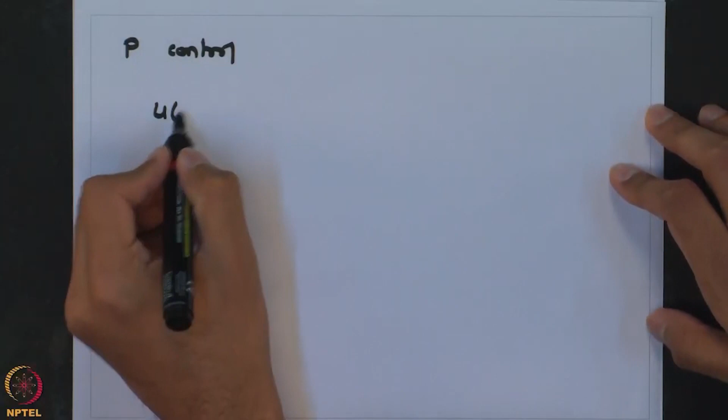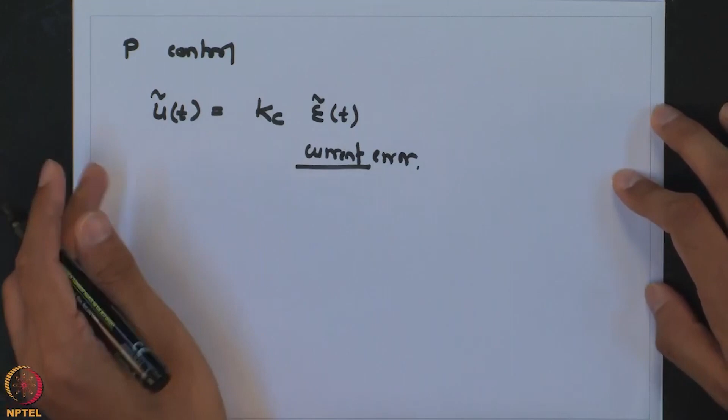So what we saw was that when we have a proportional controller, the deviation in u was proportional to the current error. So we are just looking at whatever is the instantaneous value of error, and the controller is taking action based on the current instant, and it is not looking at how the process has reached there. So there is no contribution coming from the past history of the process, and that is resulting into this offset.

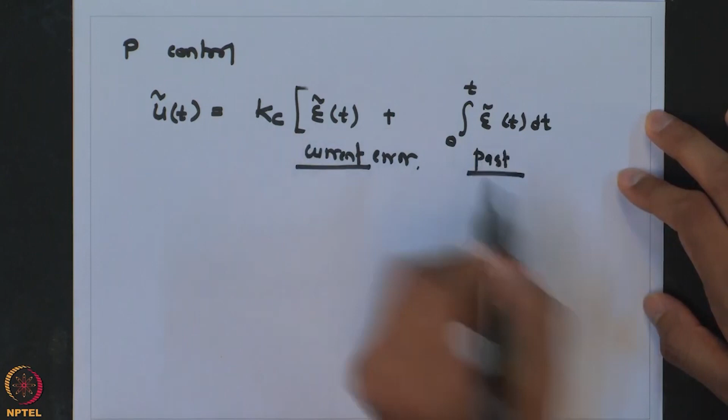So in order to improve this performance, or rather in order to get offset free response, what we do is, along with the current value of error, we also get a term which is proportional to the integral of all the previous errors. So along with the current contribution, we also look at the past contributions, or how the system has reached to that point, and the weighing factor for that is 1 over tau I.

Will come to the significance of that in a bit. So what we have is a controller which takes action proportional to the error as well as the integral of the error. That is why it is known as a PI controller, and we will see how this addition of integral action is going to cause the offset to go to zero even for finite values of controller gain.

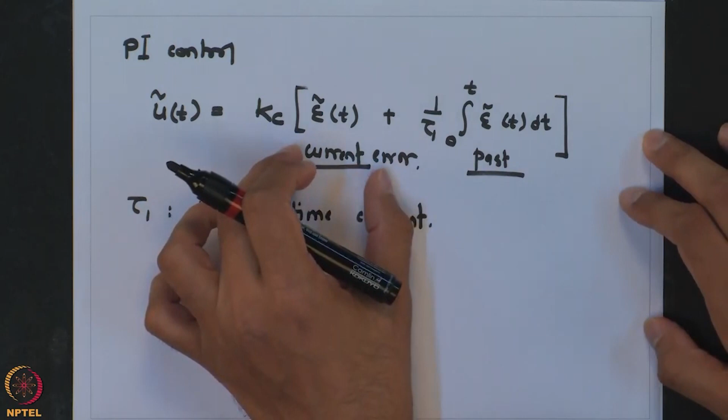So this tau I is known as the integral time constant, and in a sense it is used to trade off between how much contribution we want from the current error and how much contribution we want from the previous history of the process, or past errors.

So a large value of tau I means more P than I. So there will be more penalty, or the contribution of the output will be largely dependent on the current error and less on the history.

So let us now look at how the addition of integral action is going to respond in terms of a simple process, which let us take a first order delay process, a first order lag process.

So let us start with the regulatory problem.

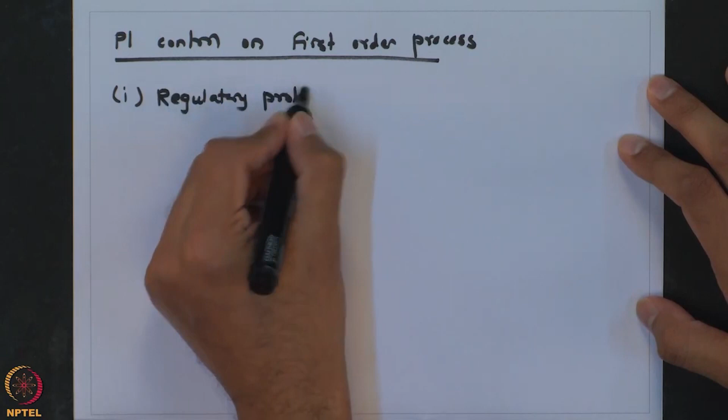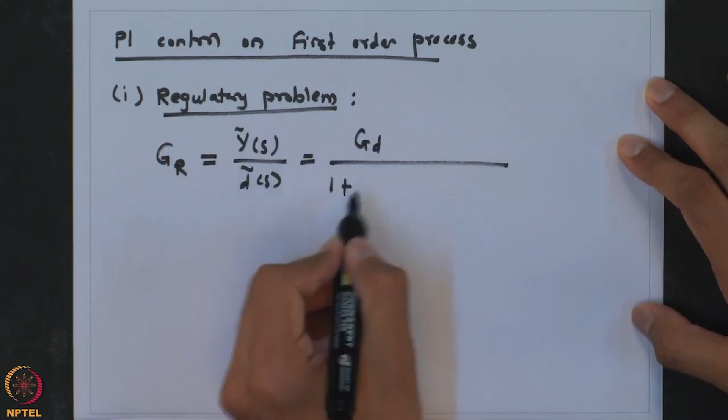So we had seen that the regulatory transfer function is given between the output and the disturbance, and it is equal to GD over 1 plus GP, GC, GV and GM.

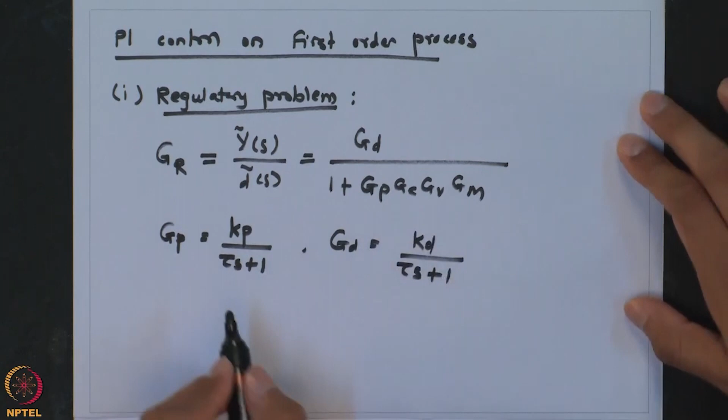In this case, we are looking at a first order process. So let us say Gp is equal to Kp over tau s plus 1, and for simplicity we will also assume that Gd also has the same time constant. It is not necessary to have these two time constants be the same, but it just simplifies the algebra. We will also assume that the measurement is instantaneous and the valve transfer function is also equal to 1.

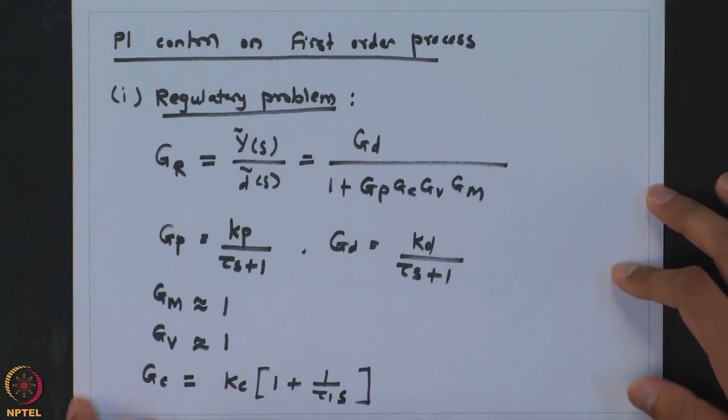And then lastly, the controller we have used is a PI control. So the Laplace transform of that will be given by Kc times 1 plus 1 over tau I, and the Laplace of integration is 1 over s. So the entire transfer function for this controller is Kc into bracket 1 plus 1 over tau I s. So let us see how this regulatory response looks like.

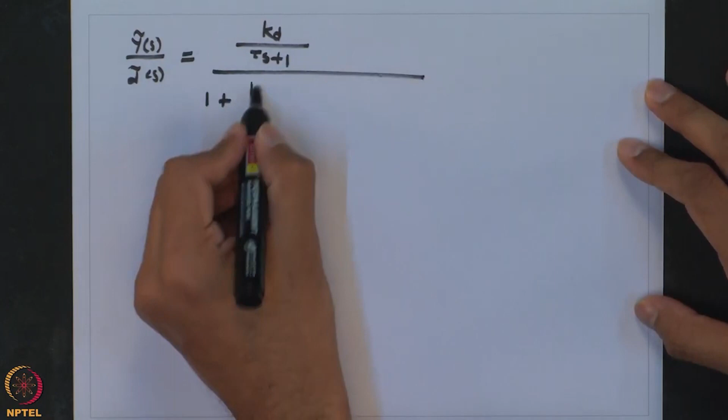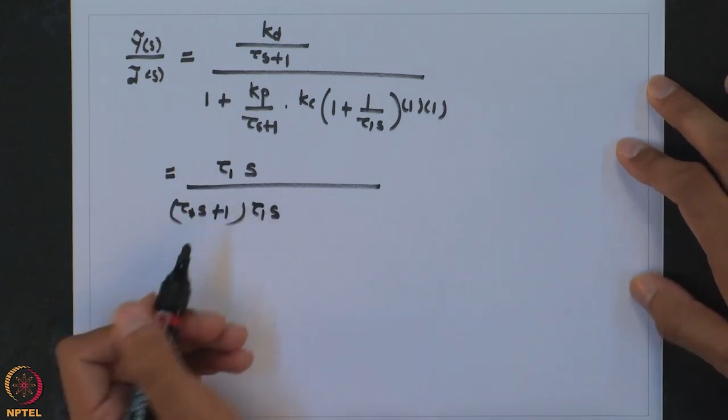So which we can simplify, and then what we get... so eventually what we will get is... so what we are getting as the regulatory response is a second order process.

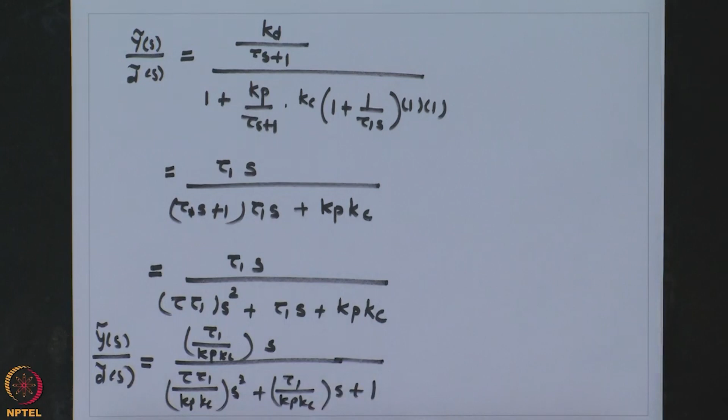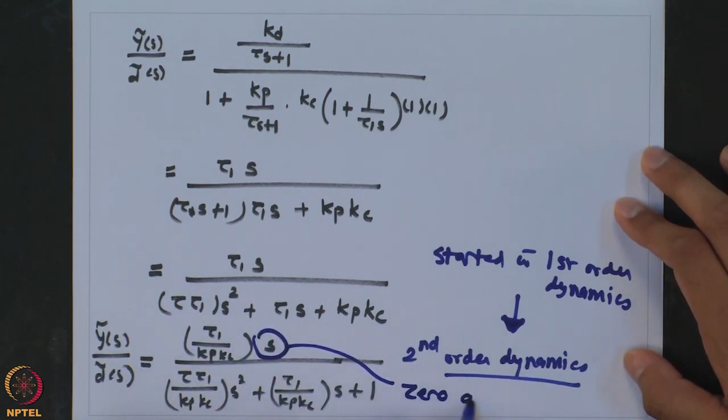So we started with a first order process, and because of the integral action we have increased the order of the system. If we try to connect to what we did during the dynamics module, this is going to cause the closed loop system to respond sluggishly compared to the original system, as we are increasing the order. But this disadvantage is coming at an advantage.

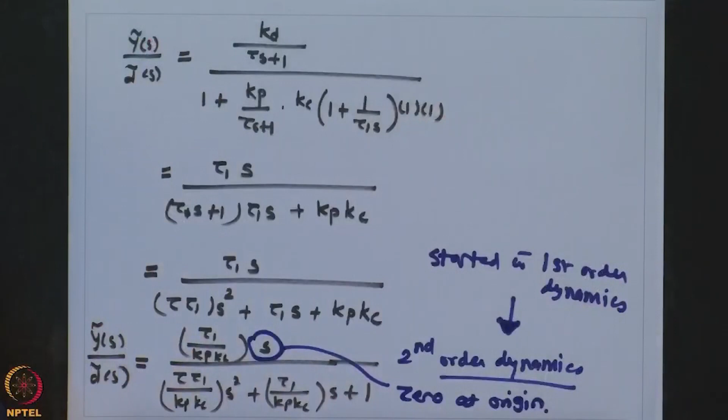We have a zero at origin. That is the main contribution of the integral action. This s in the numerator is coming because of this additional integral action. If you recall the numerator dynamics lecture, when we have a zero at the origin, the response goes to 0. So irrespective of the amount of step change in D, and irrespective of the value of Kc and tau I, as long as they are not 0 or infinite, the zero of this transfer function will always occur at origin, and because of that the response yt will always go to 0 as time goes to infinity.

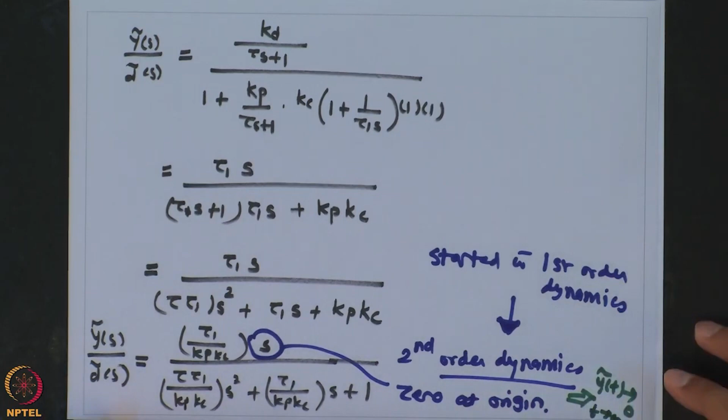So what does that mean? Irrespective of all these things, even though a disturbance occurs, the response will always go to the desired value. So we have seen that with the addition of this integral action, we have been able to cause this offset to go to 0. And we will see that the same thing is true even for the servo problem.

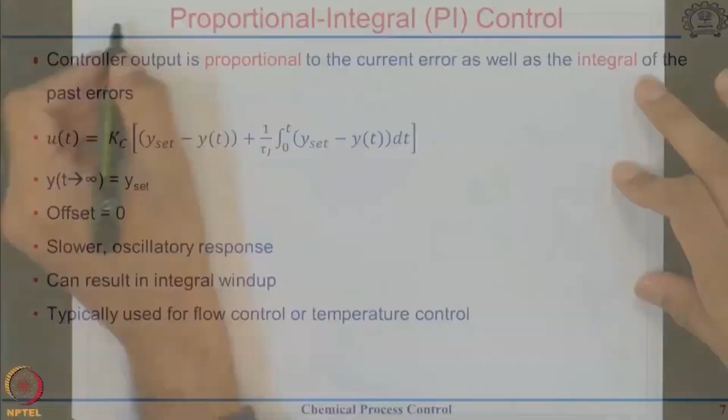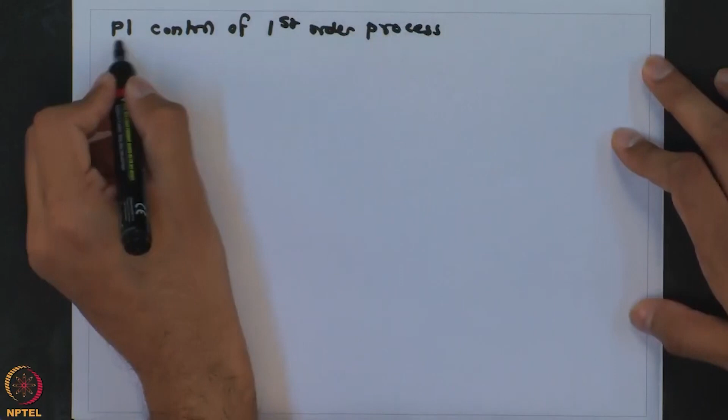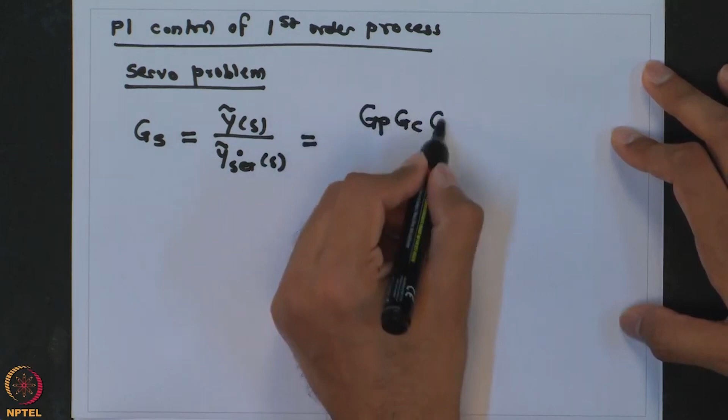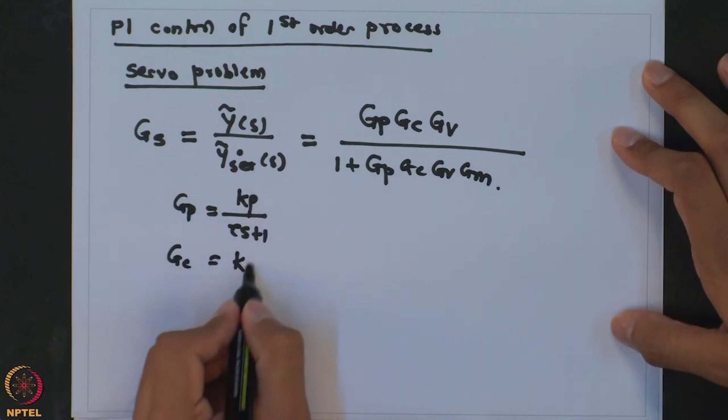So, PI control of first order process. If you look at the servo problem, the transfer function Gs is between the output and the set point, and it is equal to Gp Gc Gv over 1 plus Gp Gc Gv Gm. For this process we have Gp equal to Kp over tau s plus 1, Gc equal to Kc times 1 plus 1 over tau I s, Gm we have assumed to be 1, Gv we have assumed to be 1.

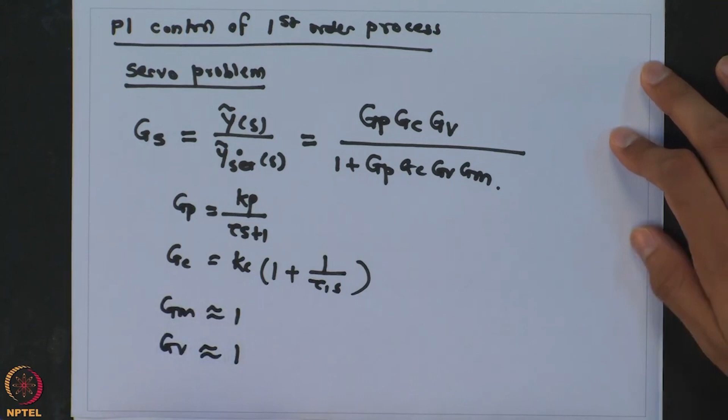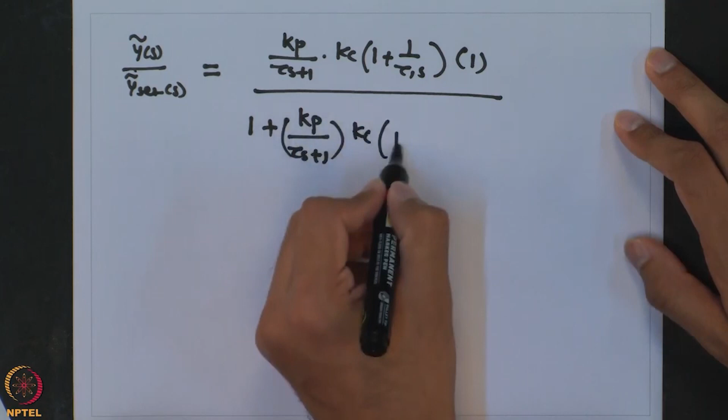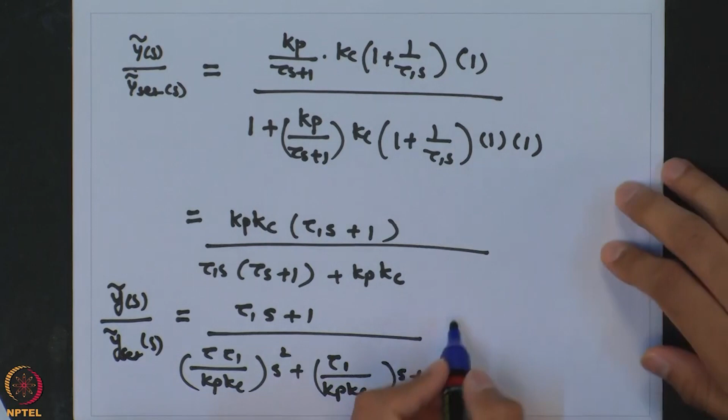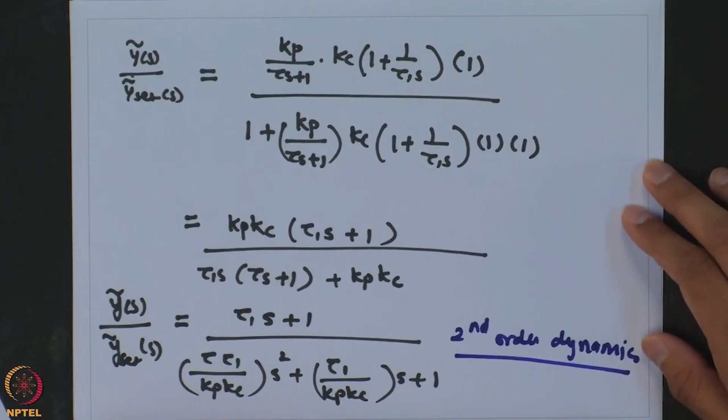So in that case, what we are going to get is as follows. So ultimately, this is the response or the transfer function between the set point and the final output. You can see that again it is second order. So again, the integral action has increased the order of the system by 1. So the system is going to be slower, but that statement is not entirely correct.

The reason being, we also have numerator dynamics, which is of order 1. So the net effective order of the system still is 2 minus 1, equal to 1. So the system is still going to behave more like a first order system with an initial non-zero slope. And if you look at the gain of this system...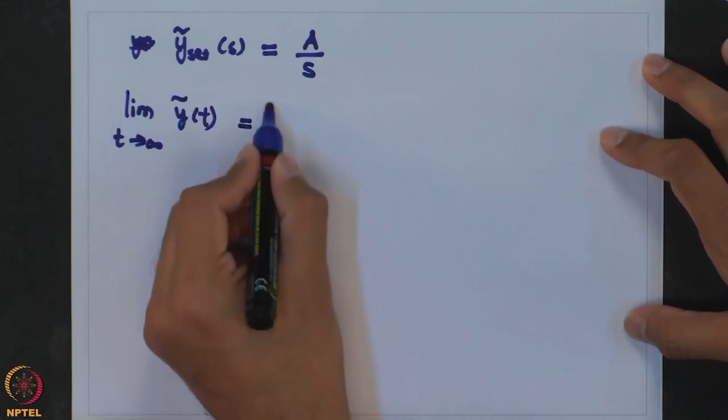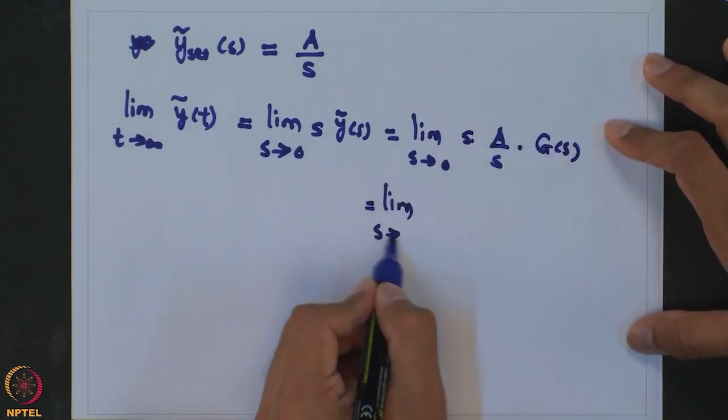So if I say the set point had a step change of magnitude A, and I am looking at where the output reaches as time goes to infinity, we will use the final value theorem. We take the limit as s tends to 0 of A times G(s), which is equal to A times the limit of that function which we have just derived, which is 1. So what you get is the final value of the output is the same as whatever was the set point change which was given.

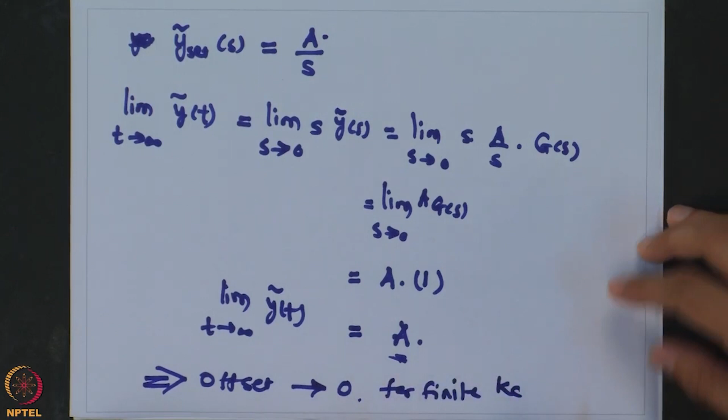So this implies offset goes to 0 for finite value of controller gain. So using both the regulatory mode and the servo mode, we have been able to see that because of this addition of integral action, we have been able to move this offset to 0 even for finite values of controller gain. Now, before proceeding further, let me also make a comment on why do we always go with a PI control

and not just I control. What if I had used only the integral action and no proportional action? In that case, we still get an offset-free response. So if I say I control, it does solve the problem of not getting any offset even for finite values of controller gain.

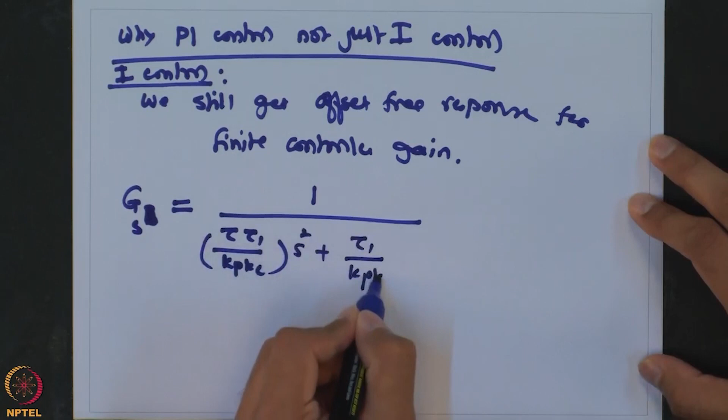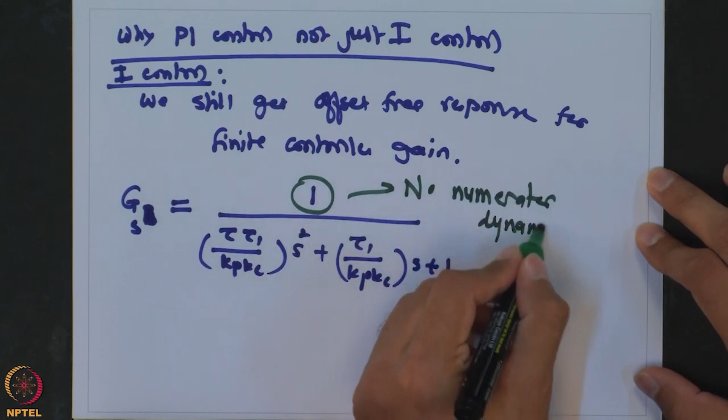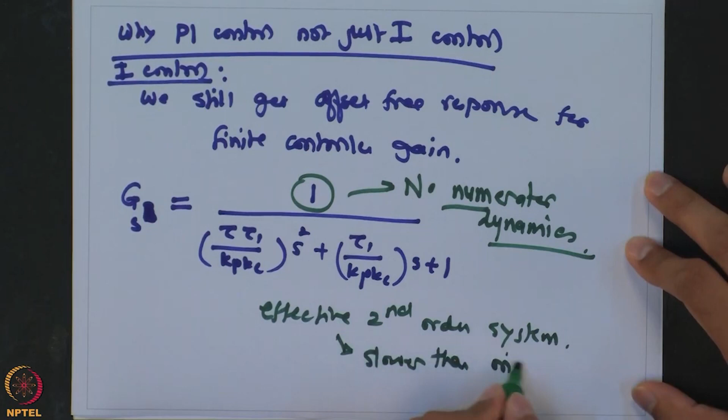But if you look at what you would get as the servo transfer function, it will look something like this. So I guess you are able to figure out what is the difference. It has no numerator dynamics. So the implication of that is this is effectively a second order system, which is slower than the original system. So if we use only the integral action, or the penalty only on the past values, the closed loop system becomes slower than the original process and does not respond as fast.

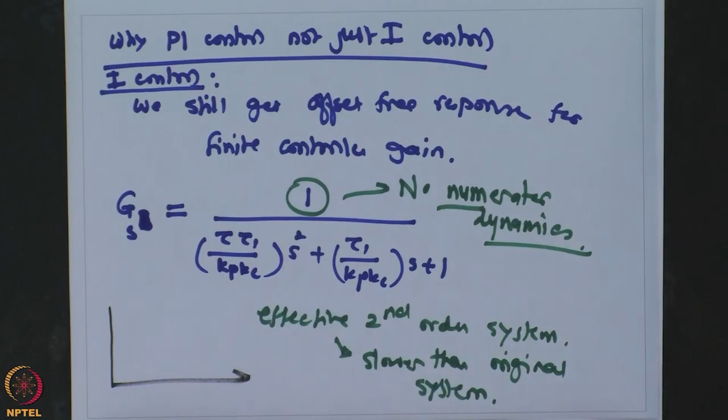So if we want to compare these two responses, in one case, if I use only I controller, the response, if it is underdamped, it will look like this. So this is only I control.

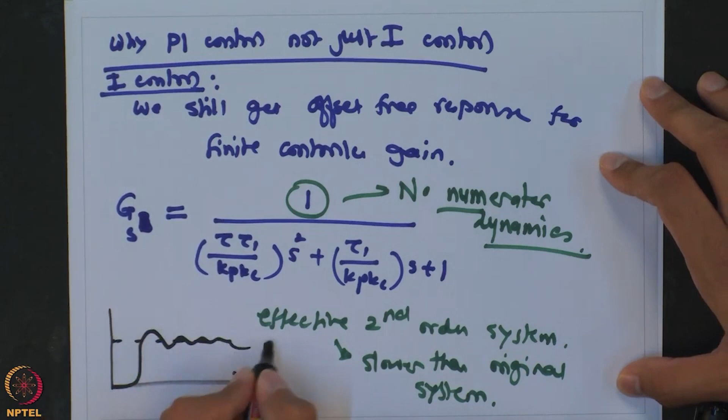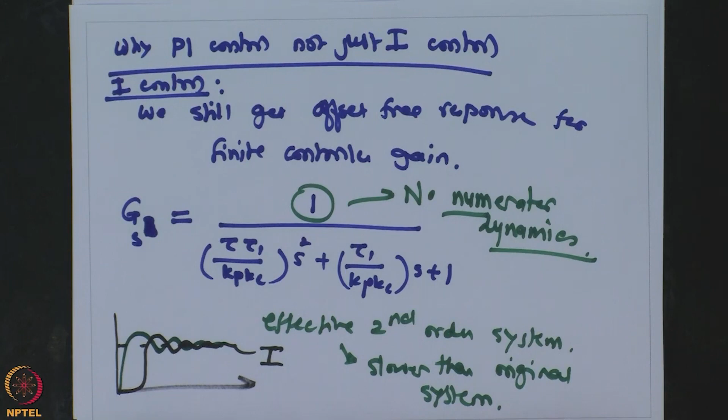The addition of this P, or the proportional action, is going to make this response look like this. So the system reaches the final set point much quicker compared to just the I control for the same values of integral time constant. That is the main reason why only integral action is never used, it is always used in conjunction with the P controller.

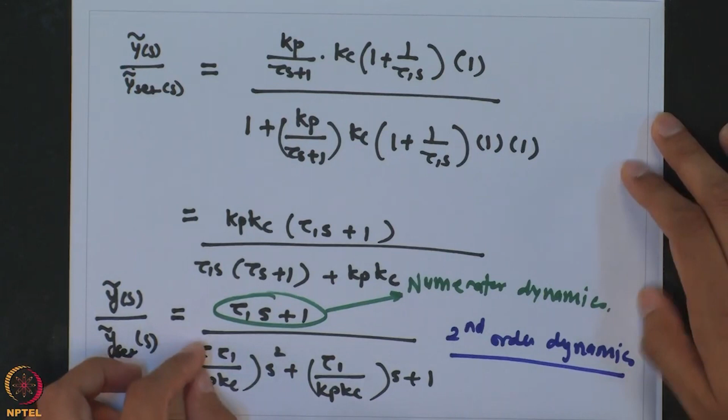Now, as we have a second order dynamics, this opens up a lot of possibilities in terms of what kind of dynamics we might expect from the closed loop system. So this closed loop system, either this or the PI control, depending on the values of Kc, tau, tau I - tau and Kp are fixed based on the process, but by choosing the values of Kc and tau I, we can always make this response become overdamped, critically damped, or underdamped.

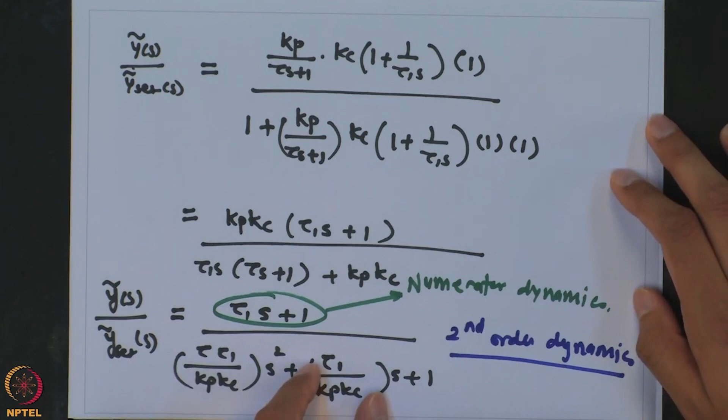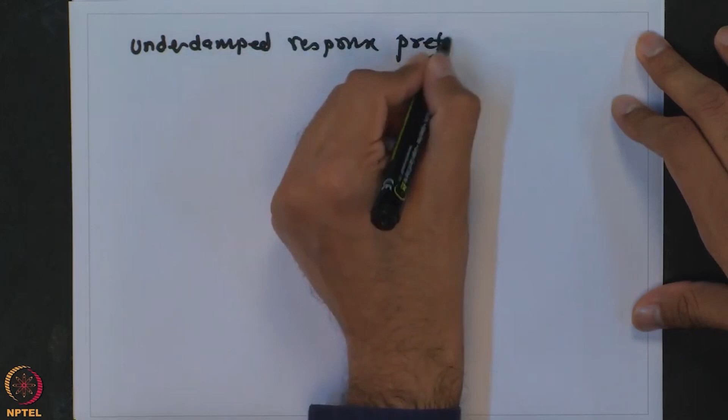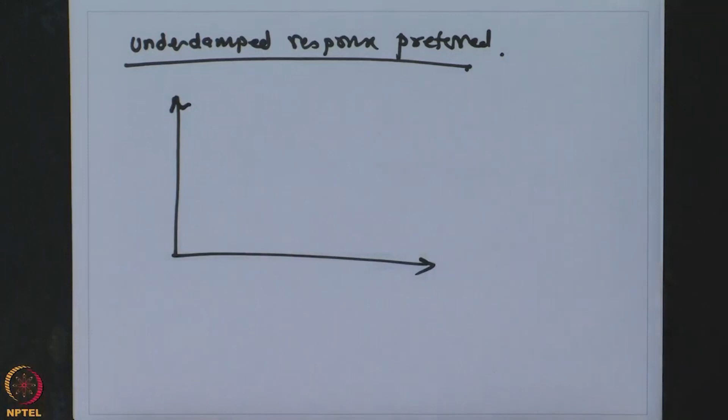Most of the time, especially for servo type problems, we try to make it an underdamped response. The reason being - let us say if we have this set point which we are tracking.

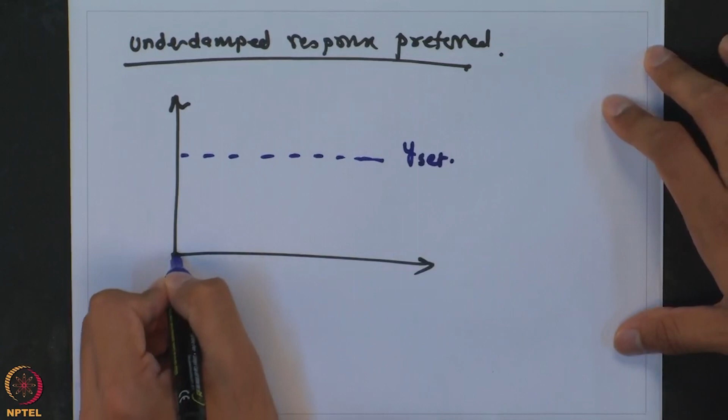If we use an overdamped response, the response will look like this. If we are looking at critically damped, it will be faster. In all these cases the initial slope will be non-zero as we have numerator dynamics. And if we have an underdamped response, this is what we get.

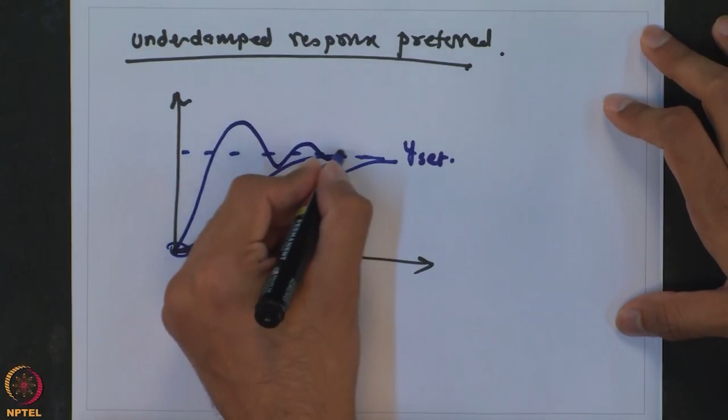The advantage of the underdamped response is that the system reaches the neighborhood of the set point much quicker compared to any of these responses. So let us say this is the point at which it reaches within this particular neighborhood of the final response - we can see that the underdamped response is much faster to reach within that value.

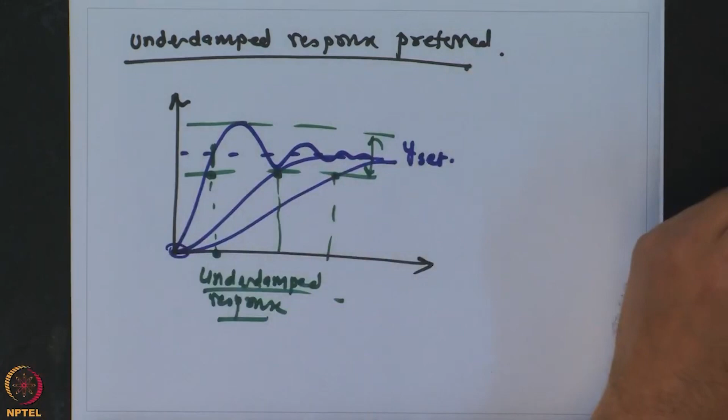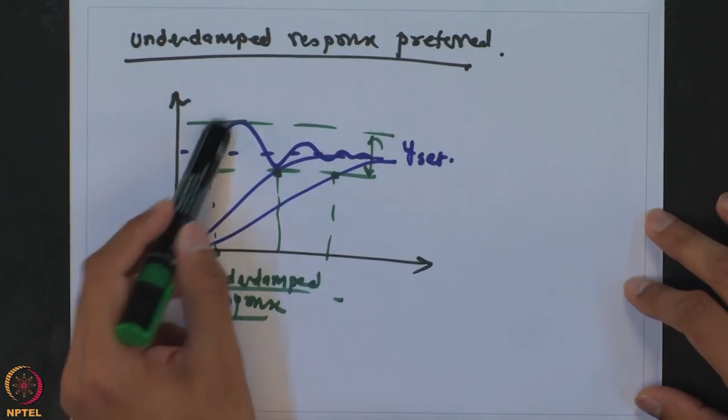So let us take an example: some sort of production rate which we want to attain. Initially we were operating at a certain production rate and now we want to increase production to this new value. You would want to reach within the neighborhood of that final value as quickly as possible, so that we start making a lot of profit rather than having a very slow trajectory towards that final value. So most of the time, underdamped response will be desired.

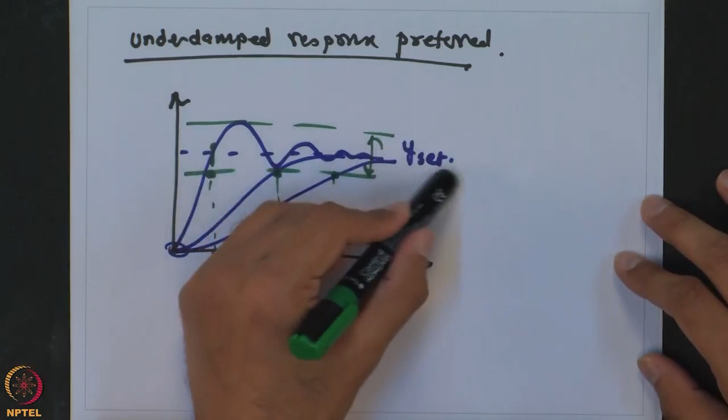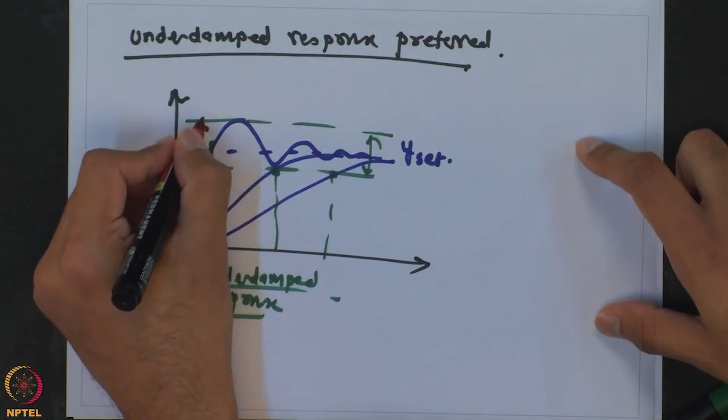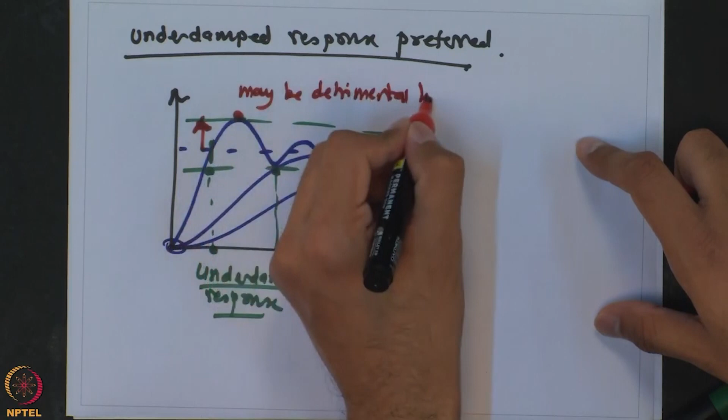The only case where we would not want to go with an underdamped response is when the set point is also close to the stability or safety limit. If, for example, it's a reactor temperature being controlled, and this final set point is also close to where the catalyst activity is maximum, the catalyst may get degraded if we increase the temperature beyond that value. So obviously, as we go for some overshoot, we are already above the safety limit or the good temperature at which the catalyst can work. This temperature may be detrimental to the catalyst, for example, or it may cause some explosion or breach the safety limit.

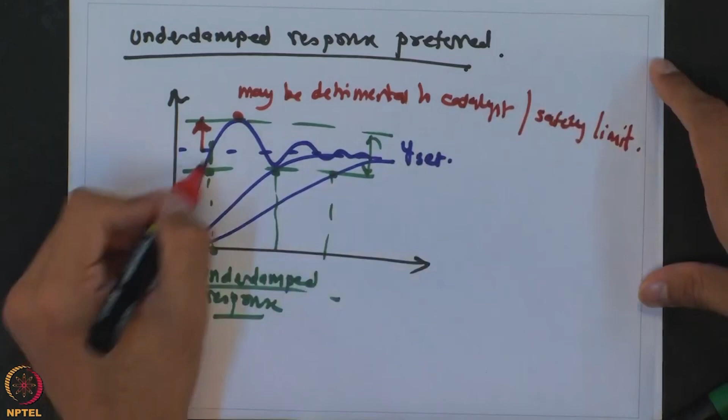So in that case, such oscillations or overshoot may not be desired, and in such cases you may resort to a critically damped response.

But having a PI control gives you that flexibility to move from one type of dynamics to another. So what we have now seen is that by the addition of integral action, we have a system which can reach its desired set point. Then you might think PI controllers should be present everywhere in the world and there is no need for anything additional.

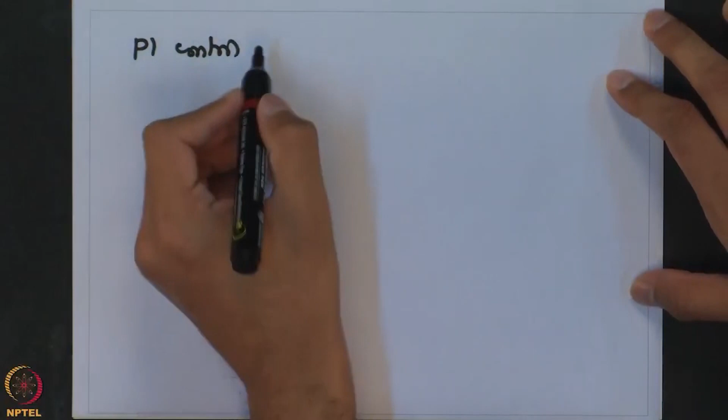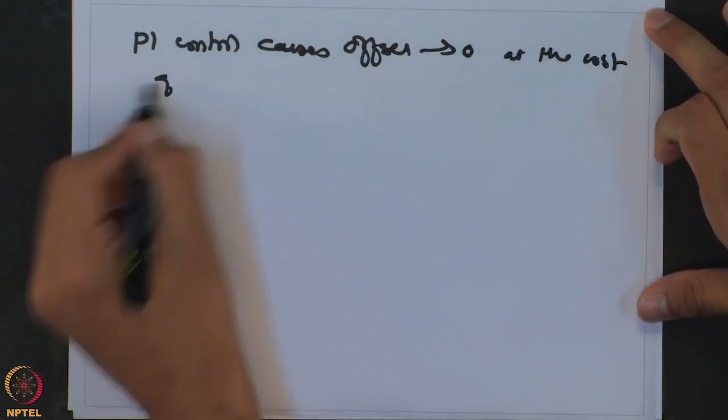But in fact, that is not the end of the world. There is always something which can improve the performance even from PI control. The whole point is that the PI controller, even though it causes the offset to go to zero, does so at the cost of some penalty. And that penalty is higher order dynamics, because we are increasing the order of the system by 1. So it tends to slow down the closed loop response.